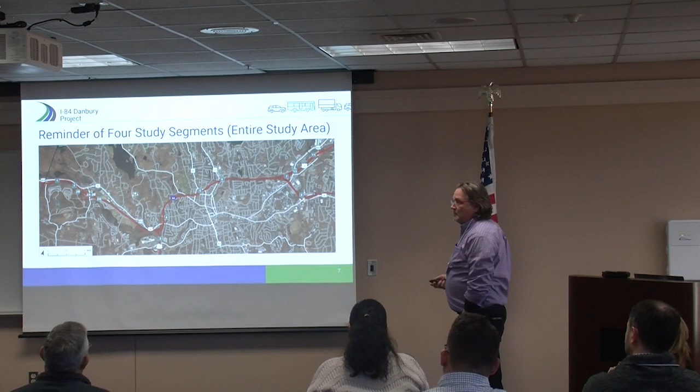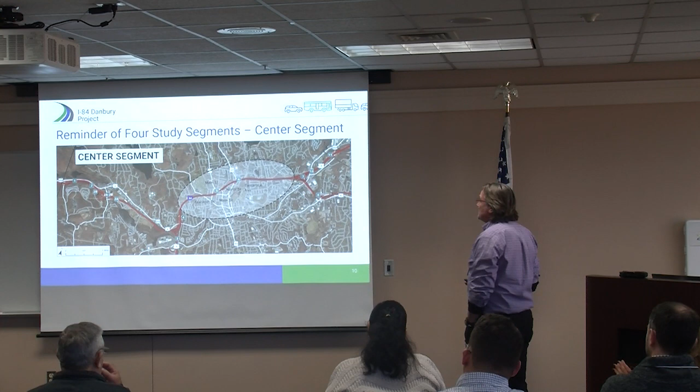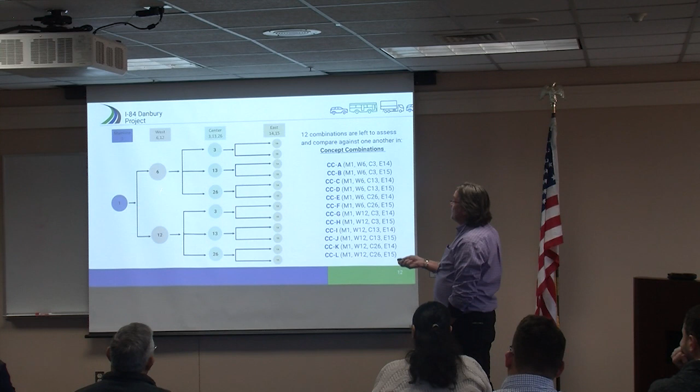We ended up, if you recall, with 1 in the main line, 2 separate ones in the west, 3, 13, and 26 in the center, and in the east, 2, which gave us, with 12 permutations, 12 concept combinations. We have labeled A through L just so we can separate them from concepts 1 through 26.

And I'm going to hand this off to Sharat and Connor. We've got a little storyboard to describe.

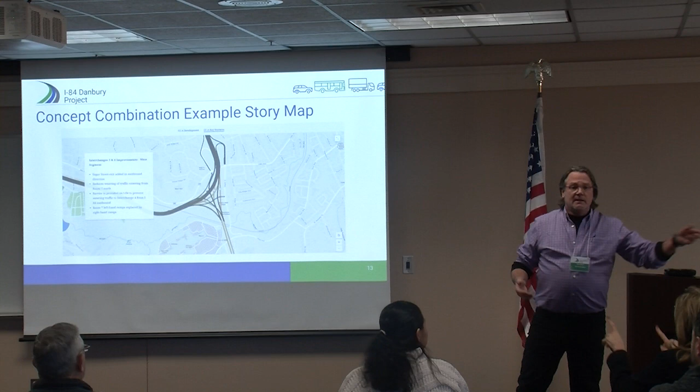Would it be easier if we shut a light off, I wonder? Is there a front light? I got it, right? No. So is that easier to see? Is this too dark? Yes, that's good, better, much better.

So we'd like you to kind of see how we combine the east, the center, the west, and the main line into one combination. So we've picked one example here, concept combination A, to go through in some detail to show you how they've been combined and what the process is.

Thank you, Sharat. So I'll go through one of them, how we combine. I think you've been through the process of seeing the main line segment, the west segment, the center segment, and the east segment. So we'll show you how we combine it.

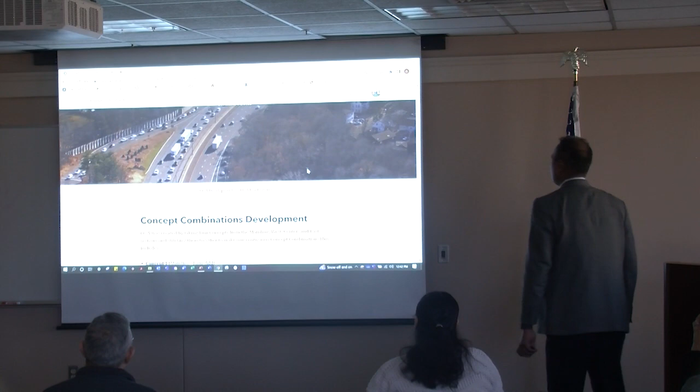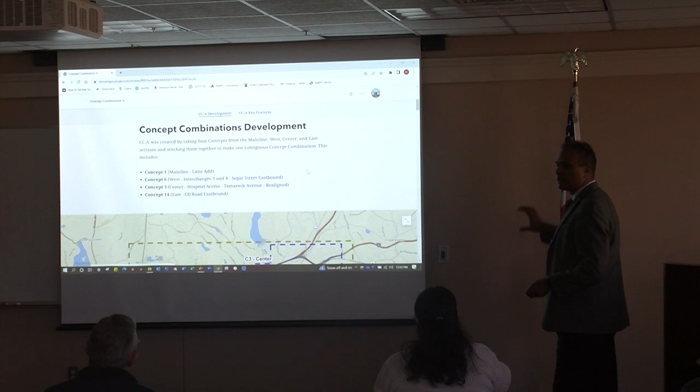This combination, concept combination A, has 4 concepts combined. Concept 1, the mainline lane add, which is the only one picked on the main line. Concept 6 on the west, the Segar Street connection from I-84. Concept 3, the hospital access at Tamarack. And concept 14, on the east, where we looked at a CD road in the eastbound direction only.

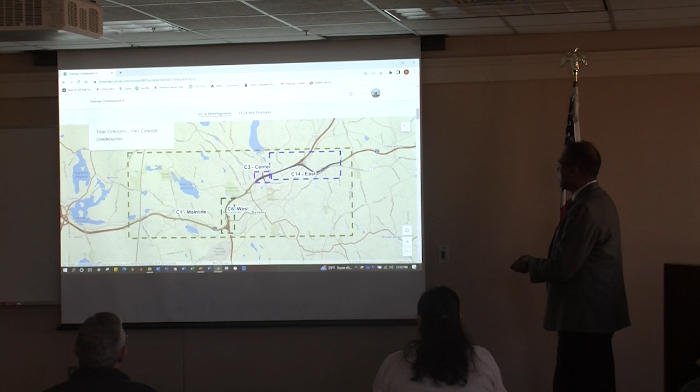So this is the combination. You can see in the map this is the mainline lane add, which is the mainline concept. The west concept, more focused on Segar Street, this is the ramp to Segar Street, this is the connection. Scroll east, Connor, a bit. And then this is the new Tamarack Avenue interchange where we are eliminating the existing North Street ramps and providing full access interchange to Tamarack.

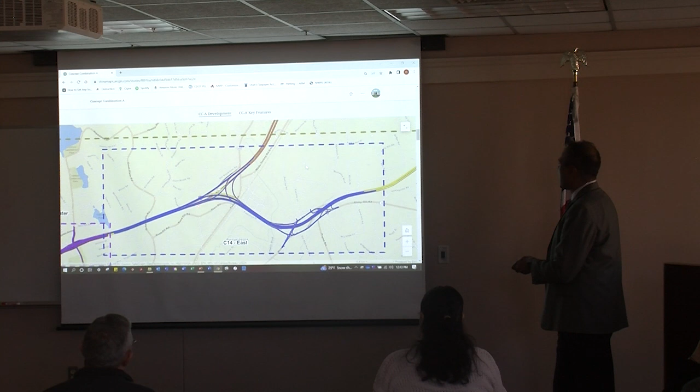And then if you scroll to the east, this is concept 14 where we have a CD road to prevent this left turn movement from 7 South to Newtown Road. There are also some revisions to what we call the turtleback—I know Barry used to call it humpback—the one-way pair that we looked at. So that is part of that 14. So those are the 4 pieces combined together.

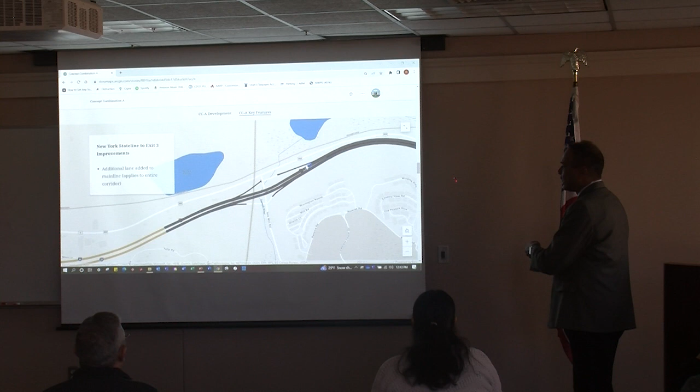Going from the New York line to where exit 3 is, where Route 7 peels off, there's no changes on any of the interchanges except we added an additional lane from the New York line to the exit 3 area. That's part of the main line concept that we carry forward as a lane add, and you'll see that lane add happens from the west to the east as we scroll around.

So here's where we get into that west segment or the west concept that we talked about. This is the changes on the ramps.

So the left-hand ramps here are switched over to the right hand. This is the 84 westbound movement to 7 South, which today is a left-hand ramp, switched to the right-hand side. Route 7 North to 84 West, which today is a left-hand entrance, switched to the right-hand side.

This is the Segar Street connection. This is where we shift 84 slightly to the left, or west, in the eastbound direction, just to get this ramp underneath it. So it's more about looking at the verticals and figuring out the best placement for these ramps. Segar Street is going to be probably the lowest ramp among the ramps.

We're going to sneak in the Segar Street ramp underneath those ramps in terms of elevation. That's why the shift at 84 was needed. We also pulled 7 a little bit to the west. This is the existing 7, and we'll see that in the next slide. But also what we're doing is preventing that 84 east movement to Lake Avenue. So anyone who exits today has to move over several lanes to get to Lake Avenue. That movement will now happen through Segar Street, so 84 traffic won't be able to make that tough movement to the lake.

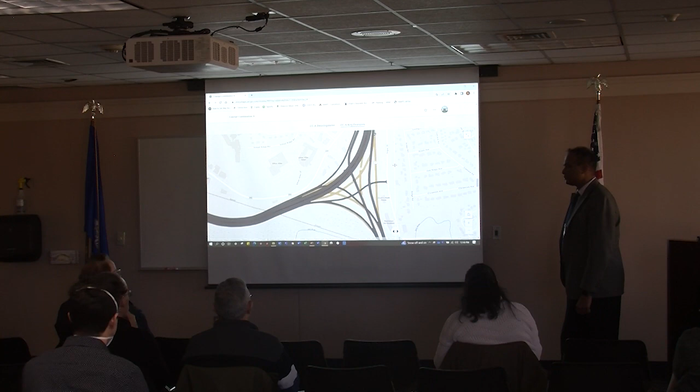Do you have profiles or grading plans that show this? Well, these are conceptual. We've done some 3D work using CAD drawings to understand this, just to understand the different elevations. We've not done full detail, that's not part of this effort. Is that available online? It's not available online, but we can certainly discuss it. I think we gave it to you, Tom. It looks like it's been changed a little since I've seen it. I mean, this is not to scale, just to make sure.

This is not an engineered plan, it's conceptually being shown in terms of the actual drawing. I just want to see that it really works.

Do you know off the top of your head the angle of this versus the existing highway right now? Because that's a major issue. One of the biggest things a lot of us hit on is the traffic more than anything that goes through the corridor. It's fast moving traffic, and that's still a pretty sharp curve. Maybe we're adjusting it by 20 degrees, if that, or even less, but I think it's still going to result in an issue in that area.

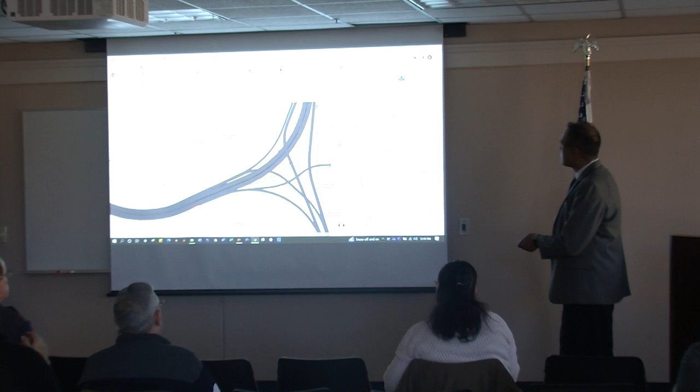So what's happening, Chris, is that today one of the things you talk about with traffic is a lot of the slowdown that happens in this area is the sight line you have going into that Lake Avenue exit. Well, sorry, I'm gonna cut you off. I'm talking more about existing traffic that goes through there. It's not so much about the people or where they're going, it's the curvature of the road.

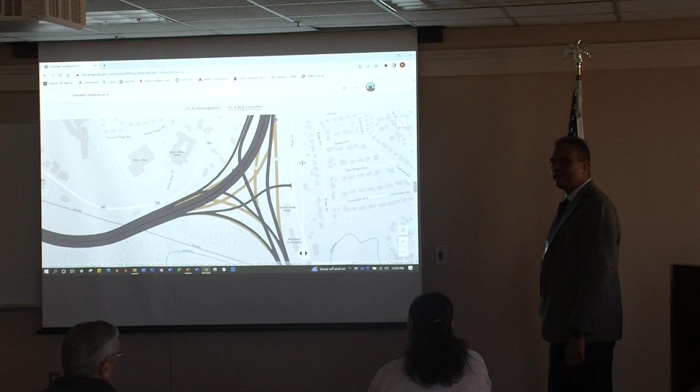By nature, people don't really pay attention, it's a very sharp curve, and when you have tractor trailers, 2x2 or even 1x2 for example... we just had a major issue on 84 a few weeks ago where a tractor trailer was essentially cut off by a driver who wasn't fully paying attention, ended up going a little more to the right, the truck swerved, flipped its entire load, and closed the highway for pretty much 5 or 6 hours. That's still gonna be an issue with this curvature now.

We're straightening it out a little bit, but it's still, I would like to see more information about this curve and the angle, and I know you said it would meet the 70-mile-an-hour adjustment, which we're gonna switch from, I think it's like 45 now. But I wanted to get a little bit more, I know we're not there yet.

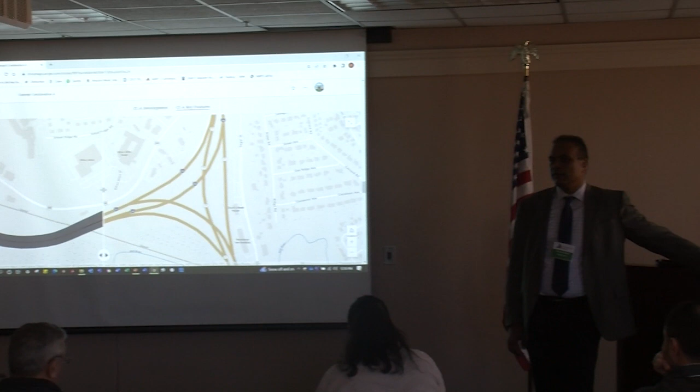We will look at it more in design. One thing I want to point out is if you look at this existing alignment, you have almost like a bell shape, up and down type thing. We are straightening this out more so you don't have this swing. Imagine going straight across today with no tangent section, then you have to swing a little bit to the right. We are straightening this out so you maintain a certain speed through the curve.

Well, yes, but you're also swinging further left, which is gonna be an issue. We obviously understand, and we'd like to try to flatten it as much as possible, but we've got some constraints, and those details get worked out as we get through the process.

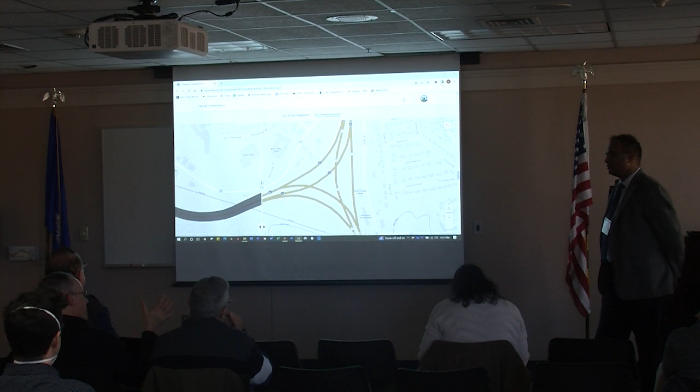That's a good point. In your experience as well, how much of the slowdown people have coming through that left-hand turn is more about the optical illusion of the space shrinking because of the overpass? You're absolutely right, it's 100% because of that. I think this bridge is one of the reasons why people don't know what's coming ahead of them.

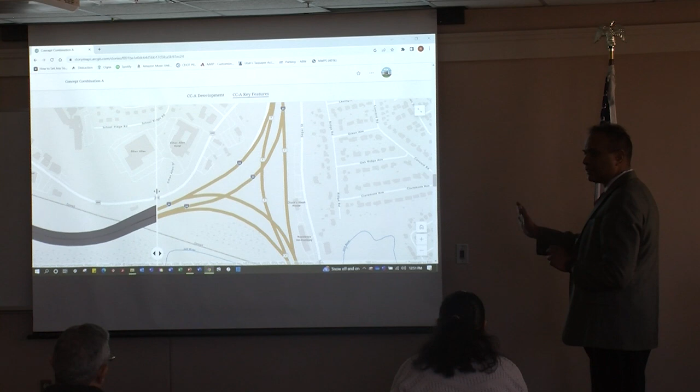So by straightening this, we're able to get a better sight line through that overpass because we're able to see better, be able to see the other side. Not the full extent of going all the way to Lake Avenue, but it opens up that vision of what you would see ahead of that bridge, which right now totally gets blocked because you just don't know when 7 is coming.

And route 7 is one of the things to consider, curve 7 now almost has a straight shot here. So your 7 is much faster in speed than 84 is, because when 7 merges with 84, it's merging at a higher speed than 84, which is not the way you'd want to do it, because 84 is a bit higher function class, a higher operating roadway than 7.

So by doing this curve, we're also trying to introduce that slowing down effect, and the merge becomes easier. There's not actually going to be a merge because you're gonna put up a wall, and the 7 people are gonna exit at Lake Avenue, but the 84 people are gonna exit at Seeger Street, and they'll never mix.

They will mix down, even the through traffic on 7 would have to mix. The through traffic would come through this area and be able to go past the Lake Avenue exit and merge back onto 84, past Lake Avenue.

You're flattening the curve horizontally, but vertically you're going to flatten that too, I imagine. That's a big issue there. I think 84 now goes down under the ramp and then back up, so it all needs to be engineered, but I think it does work with the grades we looked at. That's going to be a big improvement vertically too.

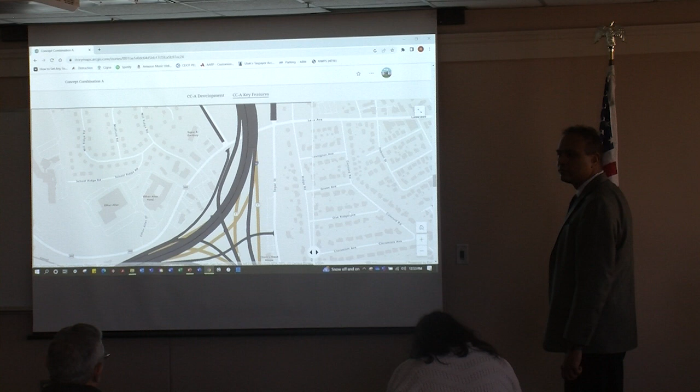So here's where we have the center section improvements, which is the Tamarack Avenue full interchange. This interchange here would be eliminated, as one of the options to connect to the hospital from Tamarack. This is concept 3 of the 3 options we looked at in the center section.

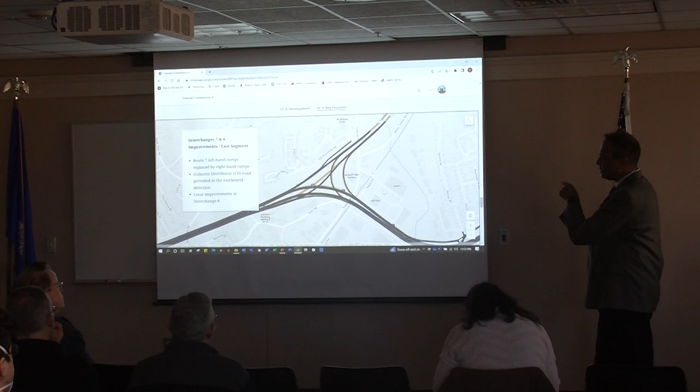Now, during our technical meetings with the city, the engineering department felt very strongly that we needed on and off ramps at exit 6. Is that option still in play here? Correct, yes, that's part of combination A. 3 is one of the options, and if you look down the list, I think E, F, G or something like that will have exit 6 in there.

So there are 3 options in the center section that Rick talked about. One of them is what I mentioned - the engineering department felt very strongly we needed to deal with exit 6, with on and off ramps in both directions, and then an access connector road to Tamarack.

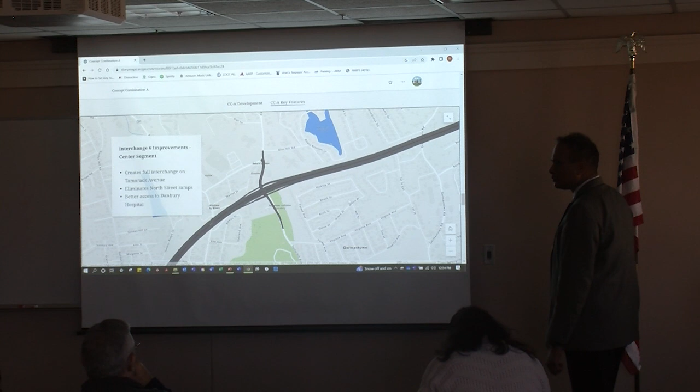So that's the center one. Going to the east, we have exits 7 and 8. A few things that 7 and 8 do: it eliminates the left-hand exit from 84 east to 7 north, and puts it on the right-hand side as a CD road that parallels 84 in the eastbound direction only.

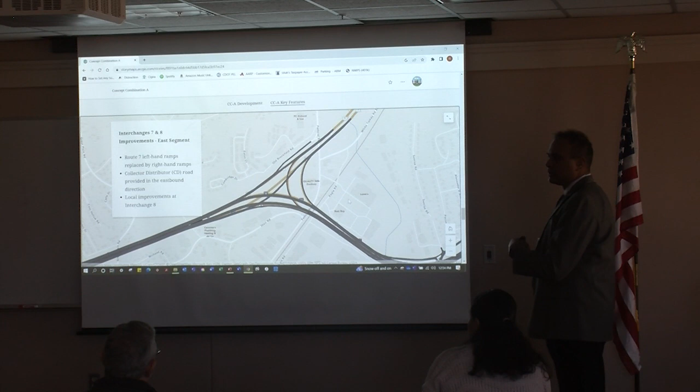Traffic that wants to get to 7 would get off the CD road and go north on 7. They can stay on the CD road and take the exit to Newtown Road. So once you leave the CD road, you have the option of going to Newtown Road or Route 7, or you can get back on 84 east if you entered the exit by mistake. So that 7 south ramp, which today is a left-hand ramp coming onto 84 east, is now on the right-hand side on the CD road with the exit to Newtown Road.

Is the elevation going to be fixed through that corridor too, from exit 7 to 8? That's another one of those corridors where you go up and to the right - we don't have many accidents there, but when they rise, generally the same thing happens: people fall asleep, truckers go straight instead of making the right. It's the same issue as by exit 3, where you go down and then up, and if there's a curve involved, people can't handle that.

So is there anything being done with that, or is it just left over? Horizontally, we're improving this curve through here. Vertically, there might be some changes in elevation to try to get these ramps through there, but I'm not specifically sure exactly what elevations are changing. There's more work on the exit 3 area related to ramps that are being moved around. Here, I'm not too sure.

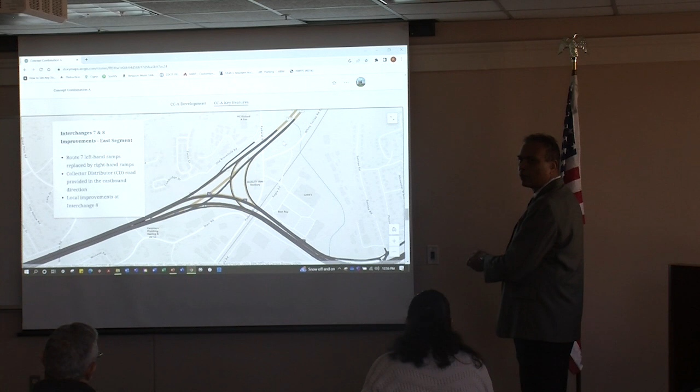I know this 7 south ramp has to go over the highway because it's right now raised over everything, and we are bringing it further down to merge with the CD road versus where it meets now. So that I know is the highest elevation of the ramp.

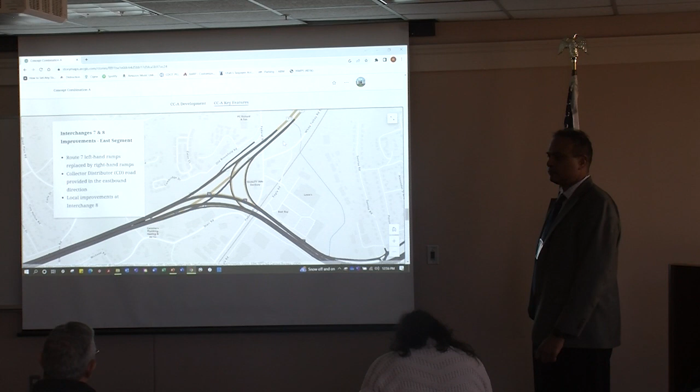So with this CD road, that means that you won't have a freeway-to-freeway connection going 84 east to 7 north and 7 south to 84 east? Correct.

Will there be intersections and signals in between, or will it be non-freeway but still limited access? Non-freeway, but like a frontage road. Yeah, basically it's a very short section, if you just want to scroll kind of a bit to the east.

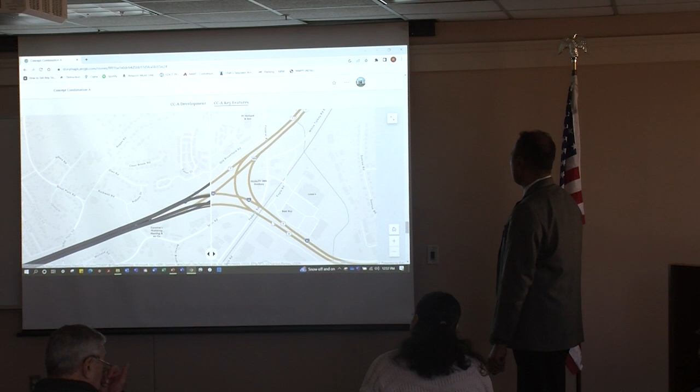Zoom out a bit more, one more ahead. I guess the question is, is it more like exit 8 in Stamford, or is it like when you're in Yonkers getting on 87? That total mess. I gotta think about that. 87 in Yonkers, or like south, right?

Basically, there's the nightmare CD road, right? Like, it's kind of like Waterbury. I mean, you have like a frontage, so there might be a light, right? So will there be an intersection? There's no light in here, so yeah.

So if I want to trace the movement, if you're going 84 east, you get off the CD road, you stay on the CD road, no signals, you're just moving. Then there'll be a ramp sign saying Newtown Road. So it'll be an exit from Newtown Road, so no signals unless you get to the Newtown Road existing intersection.

Oh, okay, so it's like the I-84, 384 interchange. Correct, kind of, like Waterbury, but it's not as high speed as that, something like that, but it's being worked out.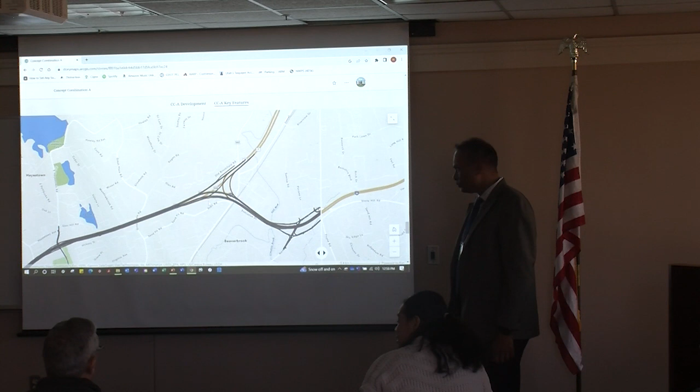So there won't be an intersection at Federal Road? No, we can't, I mean, Federal Road - we have the railroad track, we can't have that. It's gonna fly over it. It'll be just a structure that kind of goes over both Federal and the rail.

And there's a structure over the rail. Yeah, that's what I was trying to get at, make sure there were no lights, so you have free-flowing traffic. Although it would be nice to have access to the east part of Danbury there if you could.

Yeah, the problem is this is so high up that we can't get Federal Road. I mean, the only way to get to Federal, you probably know, is through the Star Ave through here. But it's very hard to get access to Federal from there.

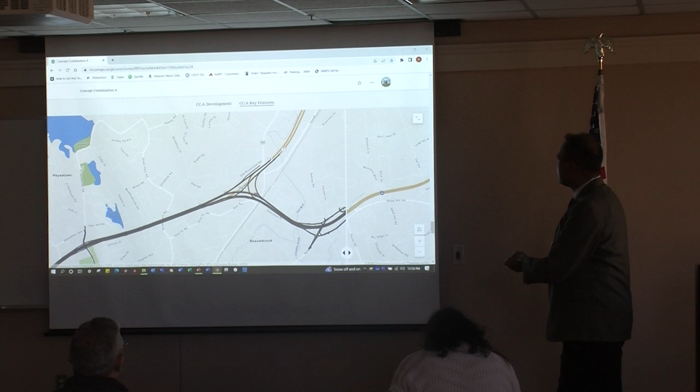That's one of the reasons we are hoping that CD road would help, because that's why we see a lot of that 7 south traffic trying to get to Newtown Road and using 84, since Federal Road is not directly connected to the east side of Danbury. That's an area I always use GPS in because it changes every single time, it's so crazy.

So hopefully this will help the move from 7 south to Newtown better, because now you're bringing everyone on the right side.

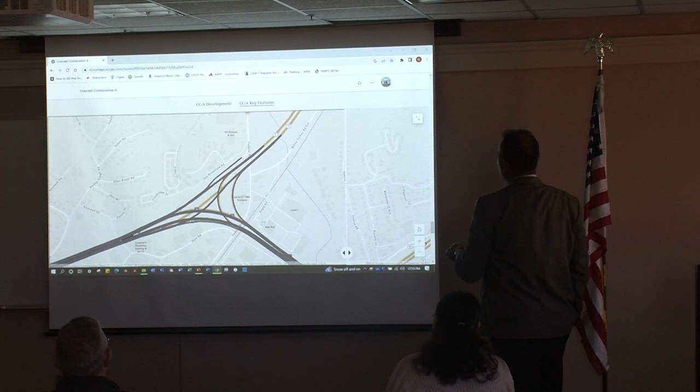So what are your thoughts on that Federal Road on-ramp to Route 7 southbound, or 84 westbound, like that ramp too, or further if you're on to the north? Because we've talked about potentially getting rid of that, since that's kind of an issue that's been long-standing where it slows down existing traffic on Route 7 already. So is that still in play?

So as part of the overall project program, this lane today drops somewhere here before you merge with 84 West. The intent is to carry forward that lane into 84.

So you get three? Two lanes - oh, so you have 3 lanes on 84 and 2 lanes coming from 7. And then we will merge them together for 5 lanes. At some point we'll drop the 5th lane and there will be only 4 lanes going west, then pick up a 5th lane somewhere near exit 5.

So will 7 then drop a lane from 2 to 1? It won't be a drop, it would be almost like a lane add, with 2 lanes from 7. So it'd be 3 plus 2, 5.

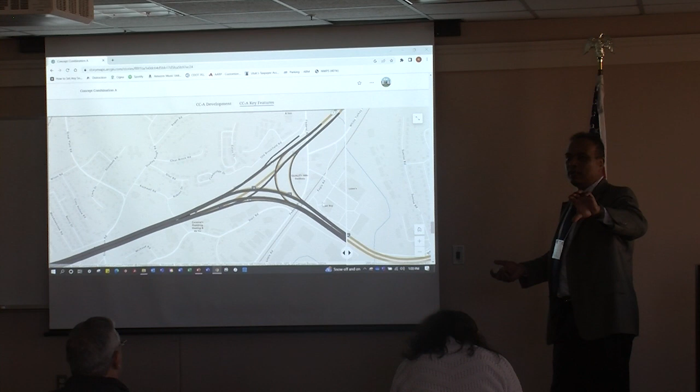So basically, in order for us to maintain lane continuity and keep 3 through lanes on 84 all the way through, we can't drop any lanes from Route 7 because it's coming in with 2 lanes. So we have to carry those 5 lanes up, and somewhere in between we'll be dropping the 5th lane, so then it becomes 4 lanes for the lane add options.

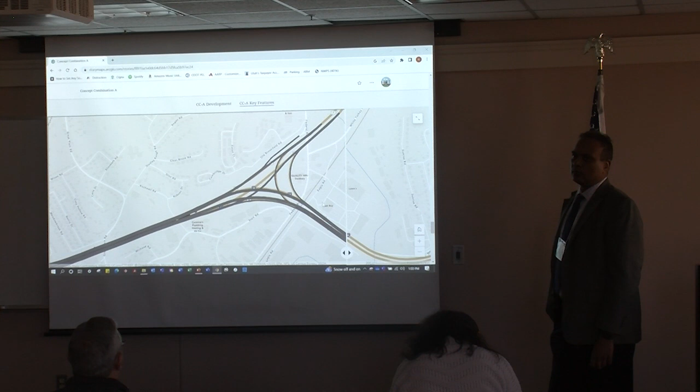My concern is that second lane you're adding—is that essentially the federal road on-ramp? It would be, and volume-wise they're pretty equal. But you're still relying on that second lane to be an on-ramp, so essentially you're still dropping a lane. Route 7 goes from 2 lanes to 1 lane. That should be 3 lanes though technically if you have an on-ramp.

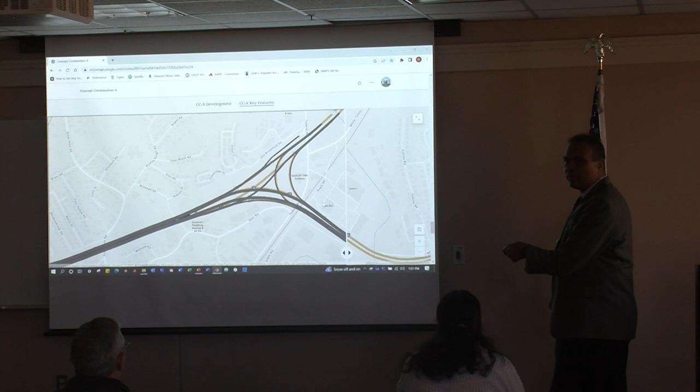No, this piece of Route 7 now is only 1 lane. Yeah, but prior to that it's 2 lanes—there's a split off there. One goes, so this will split out, this will be 1 lane, this lane will add, there'll be 2. But one is the on-ramp, right? Correct, but that's my concern, I just want to bring that up. We haven't really looked at it, it's possible we may make this 2 lanes all the way.

There's a big merge coming, and that's the issue. You see it every weekend where people slow down traffic, not because they're trying to merge, more because they're weaving and bobbing. People from Route 7 will try to go on the shoulder southbound just to pass everyone trying to merge there, because there's a lane drop here. People will try to merge right, because there's a lane drop there.

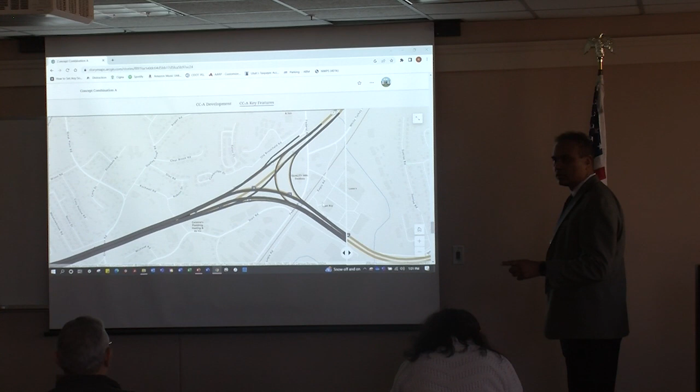I think you go uphill, which is a natural slowdown. After all that merging, you're going uphill and everybody slows down.

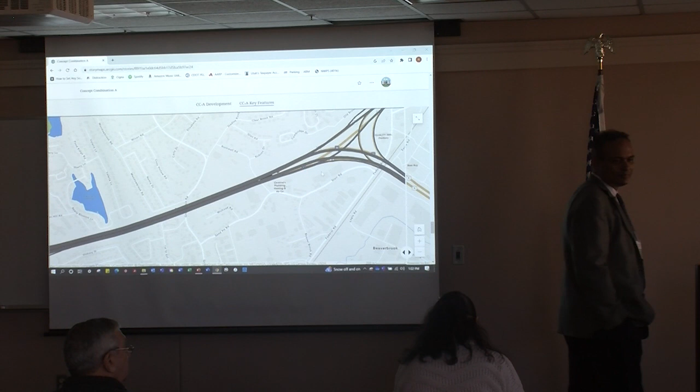Even today there's a lot more merging happening further here, partly because people are also shifting over to the left side to get to exit 3. Because that's a left-hand exit, there's a lot of cross movement, which will be avoided once the ramps are switched to the right side on exit 3—it'll feel a lot more intuitive. It's a brain exercise to get through there today, you can't be off your game. I think that's about it, unless anyone has questions.

So we basically bring that lane add right out here. You're going to exit 8, past exit 8, and merge back to existing. This is kind of where the volumes go down, because once the Route 7 traffic leaves, the 84 traffic generally becomes a more natural transition.

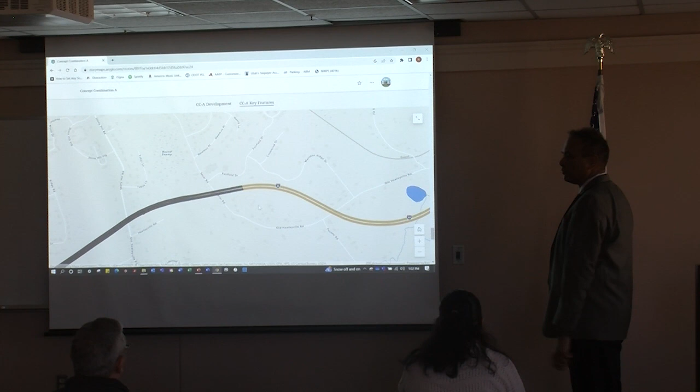Thanks, Rob. Boy, I'm glad I've got him.

As you know, in the middle of this PEL study, thanks Connor, these are concepts, and that's why we can't answer a lot of your specific questions, Tom, because there's no design done. These are conceptuals, but they've been done with the expertise of Sharat and his group, so they know it will work functionally. We're not just putting something out there that won't work functionally.

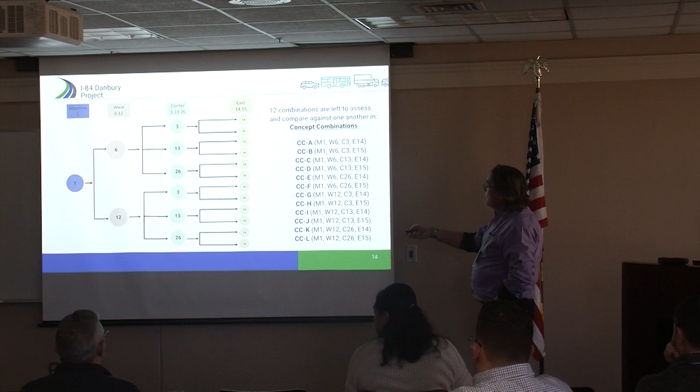As you remember, we just showed you 1, 6, 3, and 14. And Tom, to your answer, there's that 26 that has on and off ramps at 10. So 1, 6, 26, 14, and 15 are these here, E and F. So those concept combinations do include the 26. These are all still being thought of as concepts, and we just showed you how one was laid out—1, 6, 3, and 14. But we've looked at all of them and the impacts and the process to screening for all those. Does that make sense a little bit?

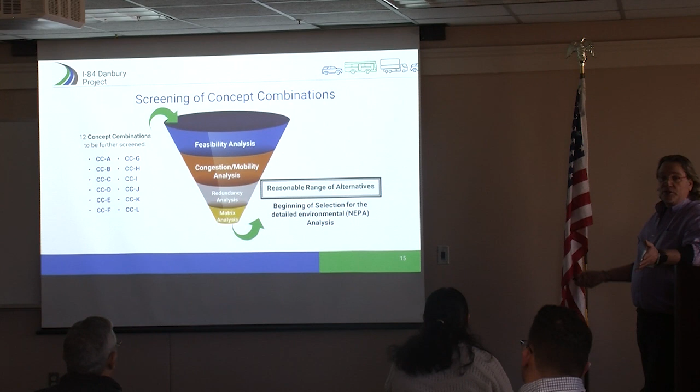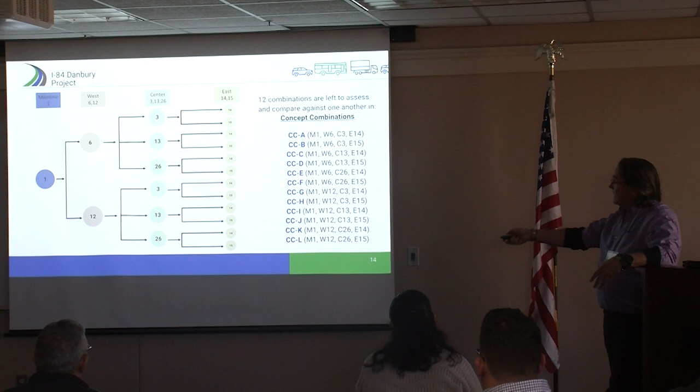If you recall, this funnel—the weathermen call it a tornado, I call it a funnel—we are putting all 12 of the concept combinations, A through L, to see if they're feasible. The first thing: can they be built? Can they function together? Can we bring 14 in with 3 when we're adding a lane on the mainline? Do those kinds of concepts work? That's our first question. Then, does it meet our PEL purpose—is it reducing congestion, is it increasing mobility, or is it just shoving the problem off someplace else? Well, across the New York line, I guess.

And then we'll be going into that redundancy analysis to see if any of these concept combinations serve the same purpose, but one is better than the other, either a little better or has less impacts. And then the matrix analysis, where you remember seeing all the red, green, and yellow dots, looking at all the different issues.

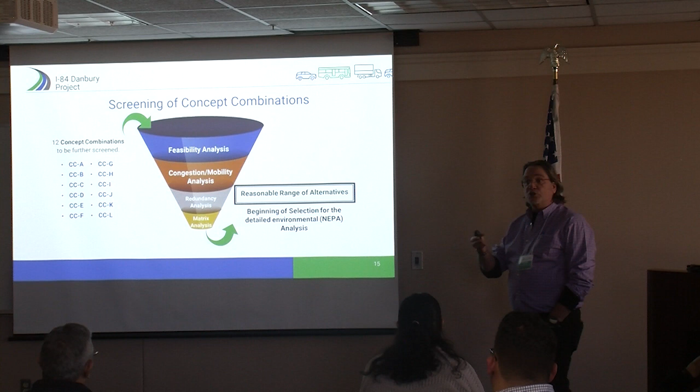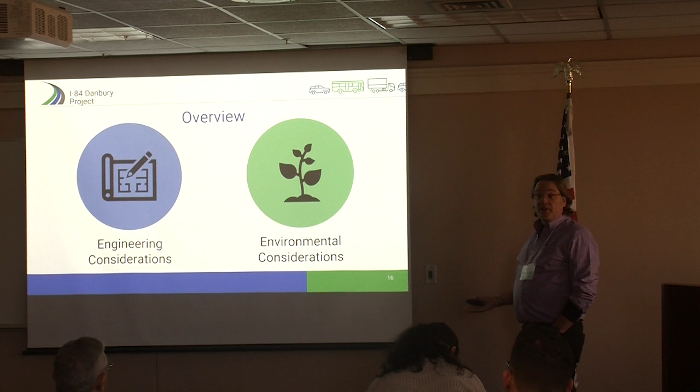If you recall, we've got engineering considerations and environmental considerations. In each of these buckets, we have key considerations and additional considerations. The key considerations really play into a decision, like reduction of weaving. But for instance, access to Bob's Burgers isn't a key consideration, but it sure would be nice if we could have that. Same with environmental, we've got key considerations that could make a decision, and additional considerations.

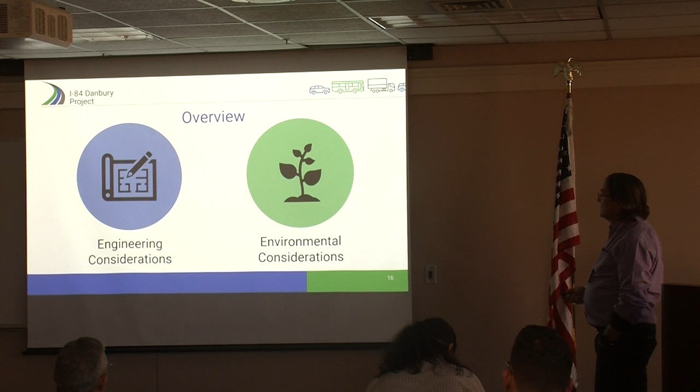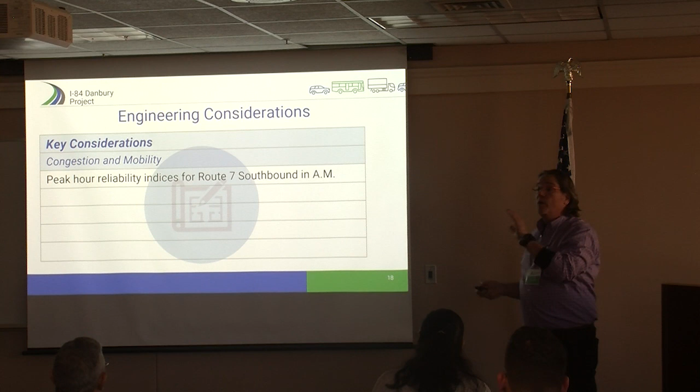In our engineering considerations, we want to address congestion and mobility. If you recall, when we broke these into segments - main line, west, center, and east - we were looking at travel times. FHWA has these reliability indices we're looking at for both directions of 7, both directions of 84, for both morning and evening time periods. We'll explain that in just a minute. But we also have the corrections of weaving. So these are all key engineering considerations.

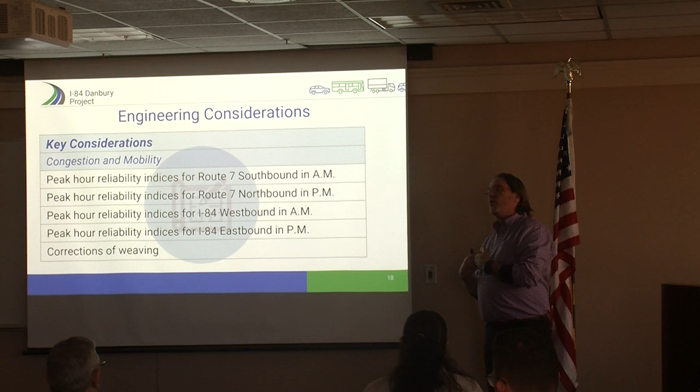The other thing we've done with these concept combination screens - for each segment, we had an entire table of considerations that were not differentiators. There was no difference between the west segment, east segment, or center segment. For all the considerations we looked at, they impacted that resource to the same degree, or met the reduction of congestion to the same degree. We don't use those as differentiators across the concepts.

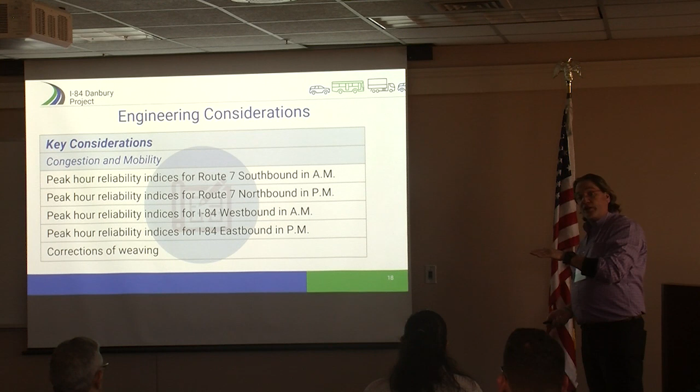So we've removed those from the concept combination screening, all those issues that were non-differentiators. So here's - and here Sherrod is going to be sitting there with his hands in his pockets, chomping at the bit to correct me, because I know I'm going to be wrong here.

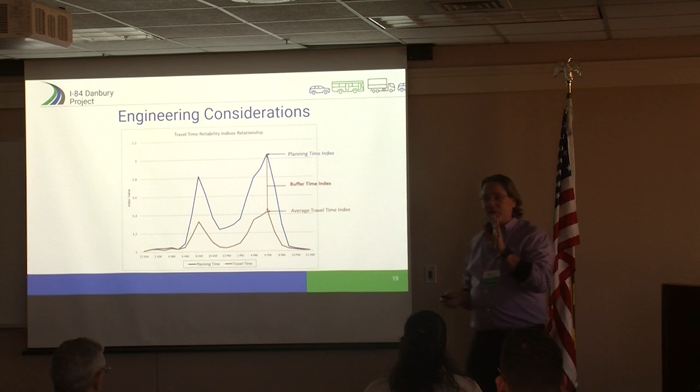So if we look at average travel time, that's what you and I experience on the road. Let's say this point right here, in the morning it takes me 1 hour to get from my home to my destination. This is on average, over the course of the year, I can get to work in about an hour. But like Chris pointed out, we've got 18-wheelers that flip, accidents, snowy weather, bad weather.

The planning time index takes into consideration all of those things. Maybe if I were to take into account all our sudden snowstorms, all our 18-wheelers that flip, maybe it takes me 2 hours to get to work. My boss doesn't care if I come in at 8 or 9, but oh my gosh, I've got an 8 o'clock meeting, I have to be in at 8. I now have to plan 2 hours instead of 1 to make sure that if anything happens that could change my drive time, I still arrive at my 8 o'clock meeting. That's the difference between the planning time index and the average travel time index.

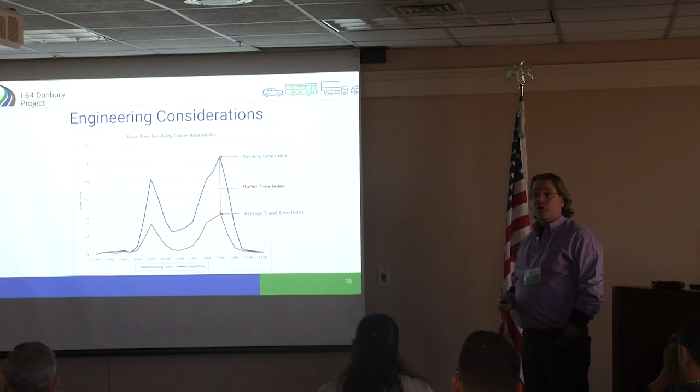And this other one is just the buffer time. So you can see there's obviously a relationship between planning, buffer, and average travel time. But the buffer time index is just how much extra time at any time during the day I would need to account for those other considerations. Sorry, I flipped that backwards.

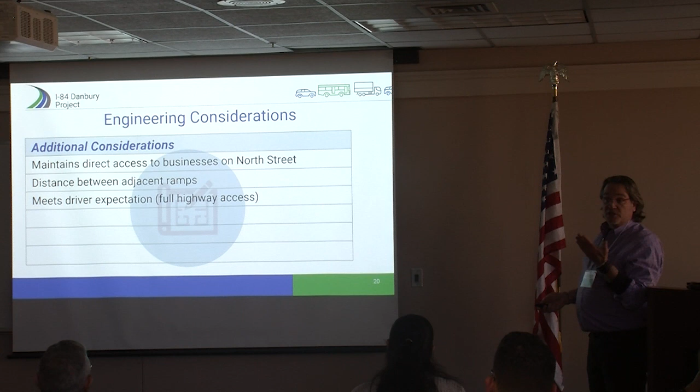So we have additional considerations - our maintenance, maintaining direct access to north. FHWA has a prescribed distance they'd like our ramps no closer than. But there are design exceptions. So it's not a key consideration, because it's not like it can't get built if they're closer than X - we still have design exceptions possible, so it's under additional considerations. It's those types of things that are additional.

Now we've got our environmental considerations. So we've got our natural environment key considerations, like wetland impacts, things that may or may not be able to be permitted. Or if I've got 300 acres of impacts versus 1 acre of impact, the Corps of Engineers is going to have something to say about that.

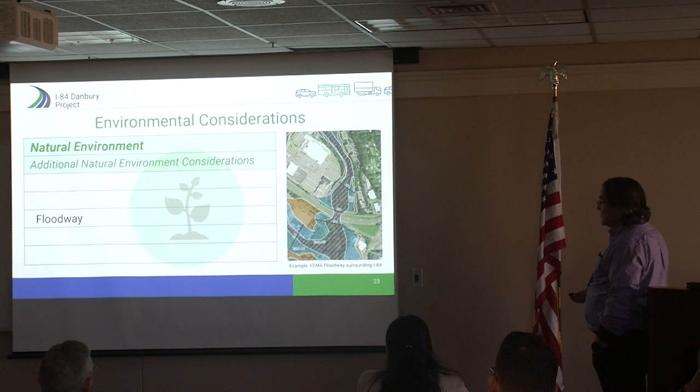As well as the stream impacts, we also have some additional considerations in the environmental, you know, our floodplains and floodways and flood zones. So that really leaves us down to the built environment. The environmental considerations are built and natural environment.

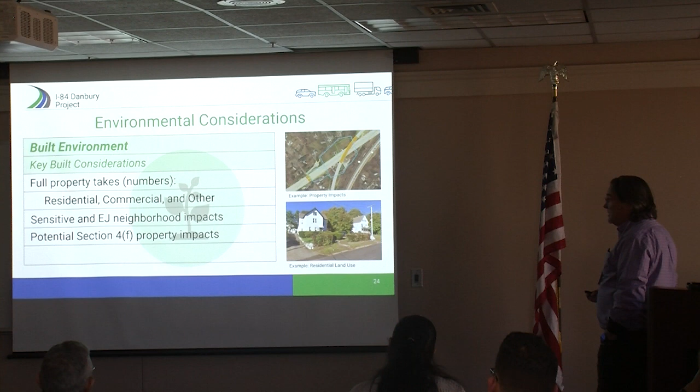Our built environment key considerations are how many property takes, whether they're residential, commercial, whatever. We also have a very sensitive EJ population through the area and potential 4(f) impacts. So these are our key considerations in the built environment.

Some of the additional ones are partial takes and this kind of stuff, but because this is not an engineered concept combination yet, we all know that if we've got a run out slope that takes 2 inches of a property, that's considered a partial take. But once we get into final or full design, when we get into the detailed environmental analysis like into NEPA, we can maybe put a retaining wall and miss that partial take. So there's a lot of differentiation once you come to partial takes versus full takes.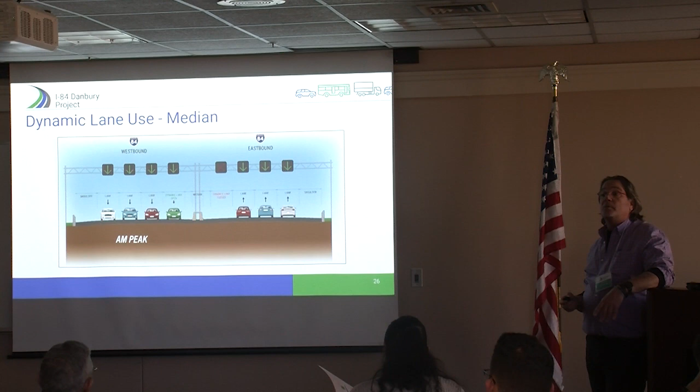There's a lot of things that could be mitigated, so we're not looking at those in detail at this big conceptual stage. So we wanted to pause for a second to see if you guys have got any questions to date, and then we're going to let Sharat talk about some of the non-highway options that we've looked at.

Clear as mud, Sharat. So just to add a little color to that, Rick had a couple of examples of the key considerations and the other considerations. So our next task is to complete this analysis and come back to you, similar to our last in-person meeting, with our docs and our matrices, and show you how these actually matched up against one another as we're looking at full solutions by adding the concept. So that's the next step for us to come to you.

Thanks, I think that's great, because that's a really good point. At that point, we hope that these 12 concept combinations, A through L, can be whittled down. We may be carrying all 12 of them into the NEPA analysis, we may carry 3 of them in. We don't know what the analysis will look like.

But that's what we'll bring to you next, is our red, yellow, and green dots, and kind of show how they all shake out for our travel time indices, for our engineering considerations, the corrections of weavings, for our built and natural environment impacts. So we'll have those red, yellow, green dots at that point and show you what our recommendations, what the PEL Study's recommendations would be on how many of those 12 combinations get carried into the more detailed analysis, where we'll start off with a 30% design, and we'll actually have a greater understanding of what the footprint could be, or what mitigation could be done to reduce footprints.

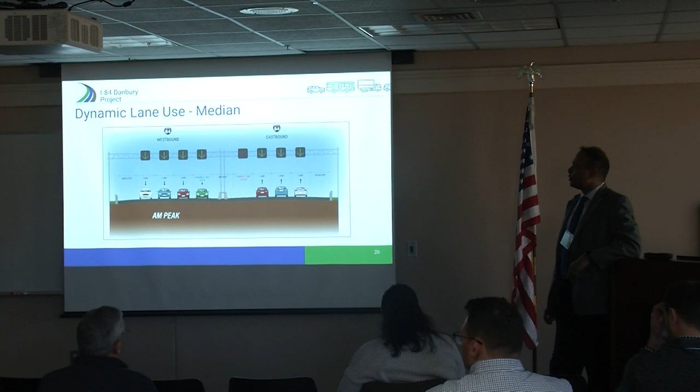So this would involve sacrificing the left shoulder? Yeah, it won't be a full shoulder, but it won't exactly be sacrificing it either, that's still being looked at. It would possibly be a smaller shoulder, but not a full one.

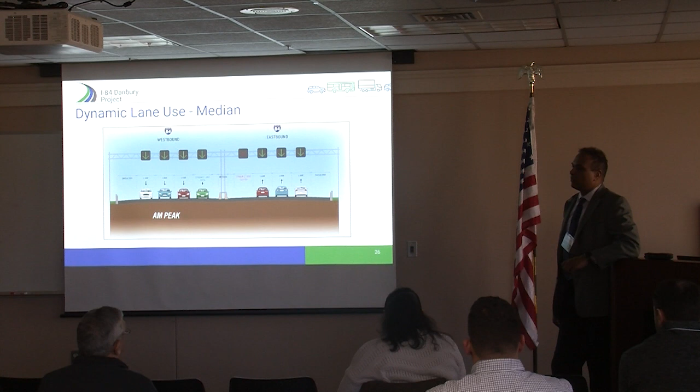One of the things that is a consideration is the drainage, because there's actually drainage along the center median. So during a storm there could be potential ponding. Reducing the shoulder would mean that drainage area wouldn't be available. That's why this lane isn't used 24/7, it's essentially to allow maintenance to keep that lane usable. If you don't have a full 10-foot shoulder and only a smaller one, there's no opportunity to clean it and maintain it as a lane during peak periods.

I know we looked at this on 95, although it was the right shoulder, not the left, several years ago, maybe 15 years ago, for peak hour use, and it was decided not to be pursued because of emergency vehicle access concerns. Even maintaining the right shoulder here, you'd still create issues with emergency vehicle access on the left, and also finding a zone for disabled cars to pull off.

And we discussed widening 84 from exits 8 to 11, and this is the exact same issue we ran into: you can't maintain the full shoulder at the times you're most likely to have collisions and breakdowns. Right, and you're right, the left side definitely has more benefits than the right side.

Correct. I do remember looking at that right side years ago, especially with the exits. The gore area becomes short, your merges become very short, so it's more of an unsafe situation. The left side, you don't have that as much because there are no ramps. But yeah, that's something we have to look at and evaluate, how much of a shoulder would be remaining if we don't widen on the right side.

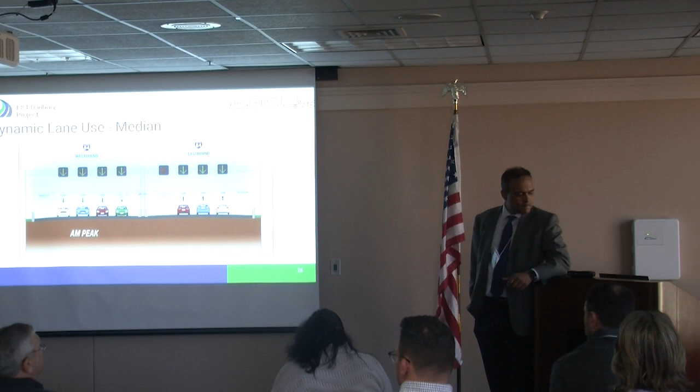So what's the next steps for this and timing on that? Is this something to be done in 6 months, or what's the next step in terms of decision making? It's still being evaluated right now, right? So we had one meeting internally with management, and they sent us back trying to get it done within the existing footprint, in a sense no widening, so we're taking a look at that and seeing what that evaluation is. But yeah, this is one of the ones we were thinking could be one of those early actions, so we can try to get it into that environmental phase and a design phase so we can get it to construction early. So I would say within the next year.

Any more questions on this before I move on to the next one? Okay, so besides just looking at this, we're now getting to the non-highway options. We did present, several PAC meetings ago, other considerations, not about moving highway traffic, but looking at other potential ways of moving traffic more locally. So we came up with some ideas, and we've had some discussions with Sharon and Hart and others. These are pieces of that presentation we made.

So this is the potential regional transit service that could be provided between New Milford and Norwalk. I know the 7 South connection to Norwalk with the rail line isn't as great, so there's a transit service that goes down to 7 along the 7 corridor. Looking at maybe improving that connection to New Milford, because there's a lot of New Milford traffic going towards York and also down south to Norwalk. So looking at more of a regional service, we came up with some initial numbers of how long this bus ride would take - I think it's about an hour, roughly.

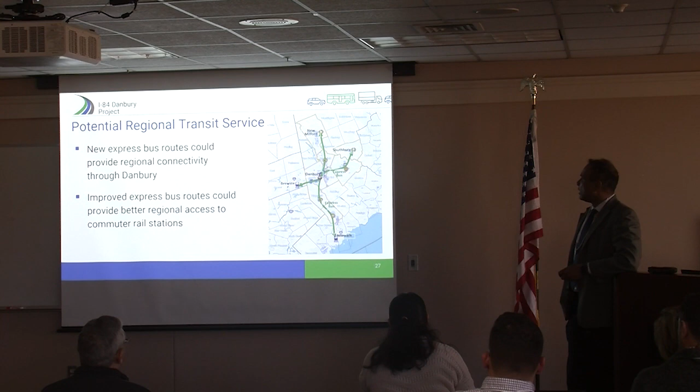So trying to move those people locally and also connecting those transit-dependent populations to the bus stops would be essential. So creating a local connection, and then also looking at some kind of circulator service in the city that would provide connection to other HART services.

Currently HART has had a pulse point. I understand that moved over to the train station, but it is going to be moved over. One of the issues was your transfer - all the bus routes come to a point in downtown, and then you have to walk over to the pulse point to connect the services either to the mall or others.

So the idea was to provide this circulator service, which would give folks the opportunity to either stop at the circulator service and go around town, without losing that east-west connection. There was a lot of connection coming in north-south to this pulse point, and then you'd have to take a service to either go to New York to get the Harlem line, or to any of the mall or western points, even WestConn on the West Campus. So this whole idea of the circulator service was to provide that transition and not have to do the transfer, connecting those two service lines.

So certainly these two services would have to be connected - this would work with HART and the department to see how this could be advanced. We found there's some mobility options here. Certainly this is not going to potentially help the 84 traffic, but it would provide that connection that could be obtained by making these points work with each other.

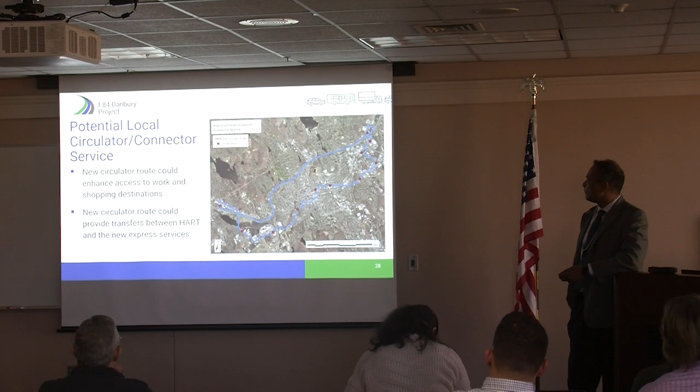If you remember, the PEL study is to link the planning and the environmental study. So the idea is it may not reduce the traffic on 84, but the idea is to coordinate and link all of the planning that's being done that aren't highway solutions with a potential highway solution, so that not only can these plans continue on, but so some choice made in the future for a build-out highway project doesn't negatively impact a plan to have a circulator route or these other ones. So these may not be directly part of a highway build project that comes out and goes to NEPA, but we hope we have enough planning that it links in so we don't preclude good planning that's already gone on in the past.

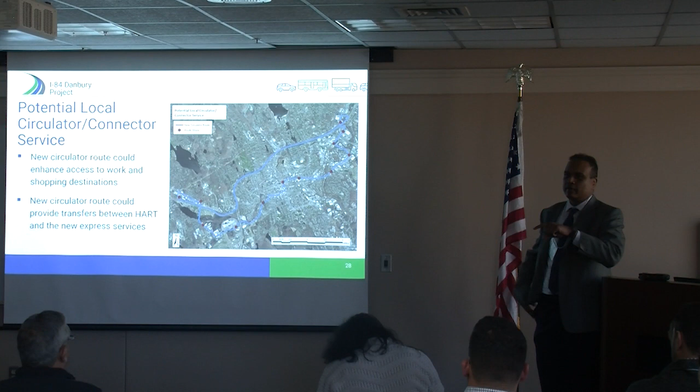Would this service be offered, if it ever came to be, only in one direction, or would both directions be offered simultaneously? We could - this is circulator routes, so certainly they are bi-directional. It's a loop service - you start and then there's a service that kind of goes the opposite way and they meet at some point. Again, those details have not been ironed out, but it's an idea.

One of the things, as you all know, is 84 is used quite a lot for local travel. People want to go from point to the east or the west. If you live on the Newtown Road area and want to get to the mall, you use 84 - you don't use White Street or Route 6 or anything like that, you basically get on 84. The idea here is to provide that opportunity for someone to get on the circulator service and not have to use the highway, which potentially could reduce some traffic on the highway that people use for these short local trips.

Well, I thought when we first started the project, one of the things we didn't want to do was ease congestion on the highway and impact congestion in the city - in other words, move it from the highway into the city, where now the city's congested during peak times. Because now traffic in downtown Danbury is horrible, where it used to take you 10 minutes to get from one side of Danbury to the other, now it takes you 20 minutes to a half hour.

One of the things, John, is that today traffic is using some of those local streets because 84 backs up quite a bit during peak period. So that's obviously something the highway improvements we looked at aim to address, to see how we can relieve that congestion on the highway, and potentially some of the traffic.

We saw this early on that some of the traffic will go back to the highway that should be on the highway, and not like if you're going from the mall to Newtown Road, we hope you don't use the highways. Use a local street or use a bus or something else. The intent is to push traffic that's intended for regional travel onto the highway, and local travel should be on local streets. That's the idea.

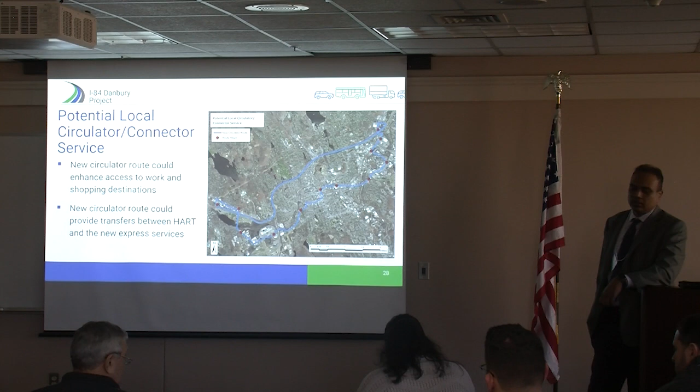When we did our initial data collection, I thought there were two-or-more car households. The issue there is the connection from where you live to where you want to go isn't seamless. So what we call access to places - if you want to take a bus today to get to the mall, you feel, oh my God, why do I need to take the bus, I can just use my car.

The idea is, again, once the service gets developed, how best you can make that connection. What's the frequency? What's the connectivity? If we create an environment where you're able to do that much more seamlessly than what we're able to do now, I think certainly this is a mobility option. Keep in mind, this is not an option where we want you to do that all the time - this is an option for a day where it's snowing or something like that, and you want to take the bus.

So again, it just won't draw a lot of people on it. But we want to make sure we plan accordingly so that it will draw enough people that will make the choice to do that.

The other thing is, for people who want to connect to Norwalk and go to the city, I think it's almost more a marketing issue than a structural issue, because I took Metro North from Danbury to the city in August. I had to go to the city and said, I have some time, I'm not rushed, let's see what happens if I take the train from Danbury instead of going to Brewster. Well, going down, I never got off the train - I didn't have to transfer in South Norwalk, it went straight through. Coming home, I did have to transfer, but the train was on that platform on the other side, right there - get off the train, 5 steps, other train right there, off you go.

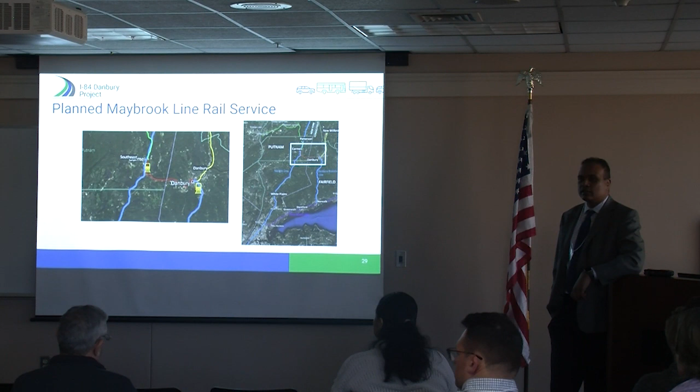Any other questions? So this one is certainly the rail analysis, rail study that is going on. Sharon, you're very familiar with that. This is the work going on in the city of Danbury and Putnam County, an ongoing effort. I think there was a feasibility study completed last year looking at the rail bed between Danbury and Putnam County. So again, we're just piggybacking on that effort. You recognize that effort is undergoing...

Potentially helping relieve some of that traffic on 84, but who is using that connection to the Harlem Line? Because there's a lot of folks who are going over to the Harlem Line, driving, parking there, and certainly this rail study would help that rail connection.

We don't expect all of these would be in place, but certainly there could be a start in some areas with some of these shorter projects. So what happens always is you start small, it grows, and it becomes like a big project.

So Sharon and our staff are looking at some of these ideas, and you need to understand that Danbury has a topographical constraint in terms of the elevations of the hills and everything, so biking is certainly a challenge. Probably because a lot of people don't use it, you have to be a really good rider to use it, especially with heavy volumes and stuff like that.

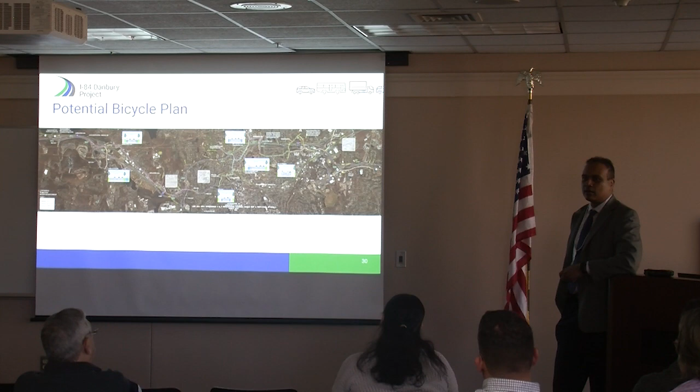So certainly those are opportunities again. We've kind of listed some of those, and something that we'll be putting, as Rick said, as part of the PEL report, documenting as options or considerations that need to be moved forward. Also to that point, the PEL study is to look at reduction of congestion and increase in mobility. And we're finding through these kinds of studies and planning efforts that an increase in transit, an increase in bus, an increase in cycling, an increase in walking could add to that increase in mobility.

Yeah, and absolutely, that's why with I-84 in bigger construction, you guys have to figure out how you get around. I-84 is under construction, so you have to look for a rail or a bus. So some of the other ones, to Francis's point, we are looking at other...

So we're looking at some departments that already have a program to look at installing cameras and signage. You've probably seen these large variable message signs on the road that tell you, 20 miles, 10 minutes, or whatever the number is. These VMS signs aren't in this part of the corridor now, but there's a program looking to put some in to inform you, like New York is X miles away, it's going to take 5 or 6 minutes. They're also putting in cameras which allow people to look at the conditions of the roadway as you're traveling the corridor.

We'll also be looking at some intersection-type improvements. We've had a discussion with Tom and his crew about the Main and Brown intersection, so the city has a plan to look at that, and we'll be investigating it further. We also talked about the humpback or turtleback on the east side, near exit 8, to see how we can improve that area.

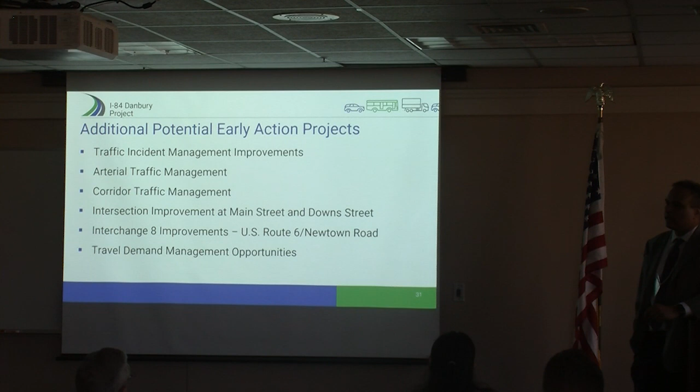So those are things listed as part of this analysis. It requires a lot more coordination and effort from various parties, but those are certainly things being looked at as part of some of the early action projects.

Cartus really helped you out—they sold the building and now everybody works from home. So that's called flexible working.

All right, thank you, Sharat and Rick. The team's doing a lot of good work continuing that on, and they've been very busy keeping us busy at the department in terms of being able to review the work they're doing.

The next steps as we move forward: as Rick mentioned, finalizing the screening of the concept combinations. We're still looking at engineering and environmental considerations, making sure we've got the right ones and are weighting them correctly. We're having that discussion now, which will lead into that range of reasonable alternatives moving into the environmental study phase. We have 12 now, and we're trying to whittle those down into a reasonable range that will move forward.

We talked about coming back to you probably January, more likely February—we've got a lot of work and holidays in between, so we'll come back with those results in February. As Rick mentioned, we're continuing to document not only the methodology but the results in the study and the PEL report, which will go out for review. We're meeting tonight with the public, and we'll meet with them again probably spring or summer to present the study results, similar to what you'll see in February.

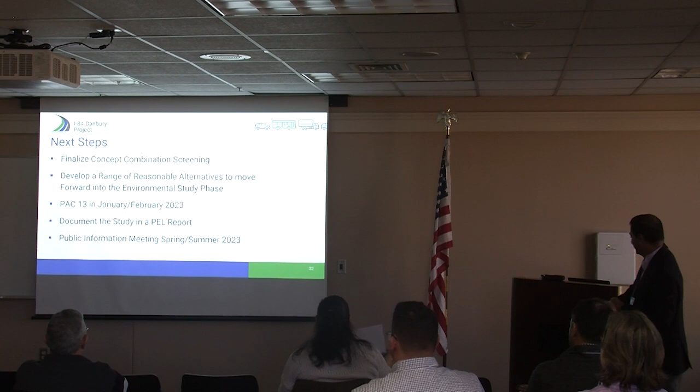Thank you again for coming, but we can answer any other questions.